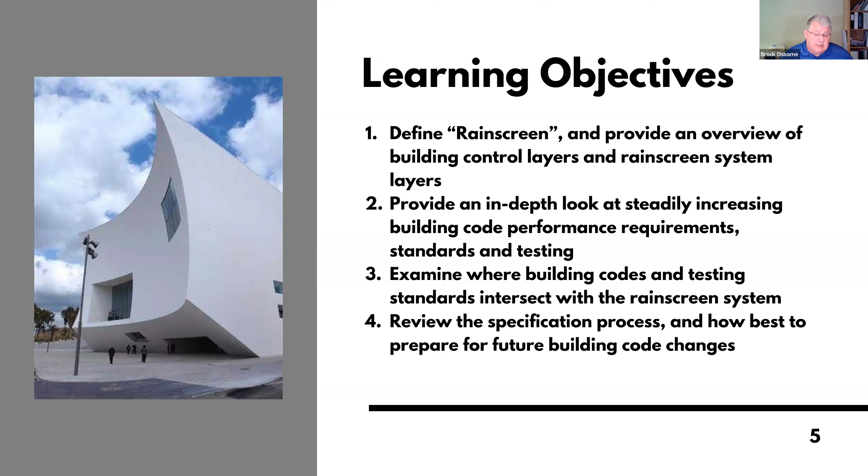In this first learning objective, we're going to provide a comprehensive overview of Rainscreen systems. This will include defining the term and functions of the system and reviewing the various control and system layers that make up a Rainscreen.

While Rainscreen systems are considered newer in the US, Rainscreen has a long-standing history in other markets. In Europe, for example, the concept of Rainscreen dates back to the early 1900s. As component manufacturers made their way into the North America market, there was some confusion around what a Rainscreen was. In early 2020, an organization was formed in an effort to provide clarity and become the authority on Rainscreens. This organization is called RAINA, the Rainscreen Association in North America.

RAINA has defined rain screens as a double layer construction that utilizes a surface to help keep the rain out and an inner layer to offer thermal insulation, prevent excessive air leakage, and carry wind loading, with a cavity between the two that provides drainage and drying.

The term rain screen has been defined previously in a few ways: first, as a single building skin material, which is really just a cladding; second, as a collection of individual components aimed at functioning as a system, which we refer to as a Frankenstein system, and we'll discuss the ramifications of these later on in the presentation; and finally, as a building science principle, which is really truly what a rain screen is.

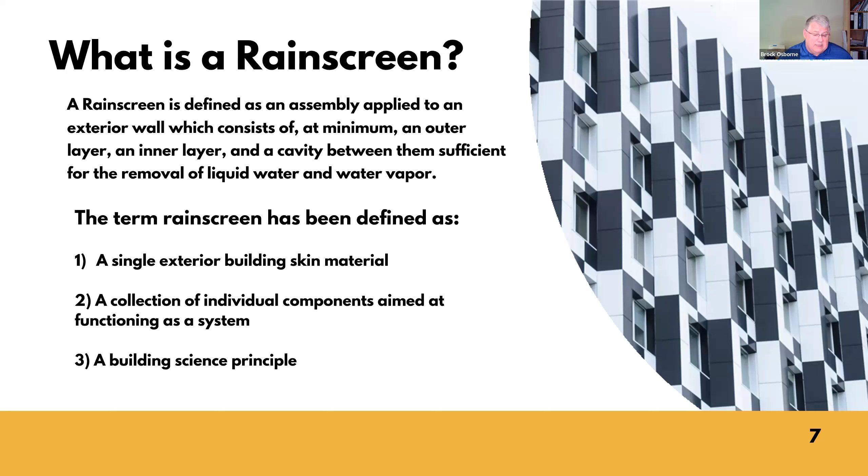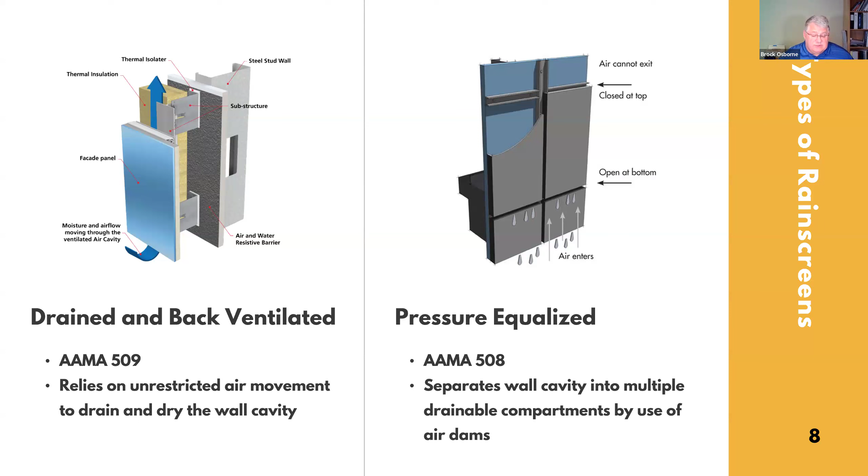In addition to the term and definition of a rain screen, there are a few different types. First, you have drained and back ventilated rain screens. These systems rely on unrestricted air movement to drain and dry the wall cavity. Second, there are pressure equalized rain screens, which use multiple drainage compartments and air dams to achieve their functionality. These are more common on tall buildings, which are subjected to higher wind loading.

As rain screens become more popular in today's buildings, we as designers, specifiers, contractors, and installers should become more familiar with their functionalities. The function of a rain screen follows a 3D approach to rainwater management: one, deflect; two, drain; and three, dry.

There are also other important building science requirements which extend this functionality: water management, which is a function of our ventilation cavity—without the cavity, we no longer have a rain screen system; and two, structural integrity, which is determined by the cladding durability and impact resistance, as well as the subconstruction pattern and fastening schedule.

Three, energy conservation, which is achievable with continuous outboard insulation and a thermally broken, thermally efficient subconstruction system. And finally, fire mitigation, which is reliant on full assembly flame spread tests and appropriate fire break details. We'll get into greater detail on these a little bit later in the presentation.

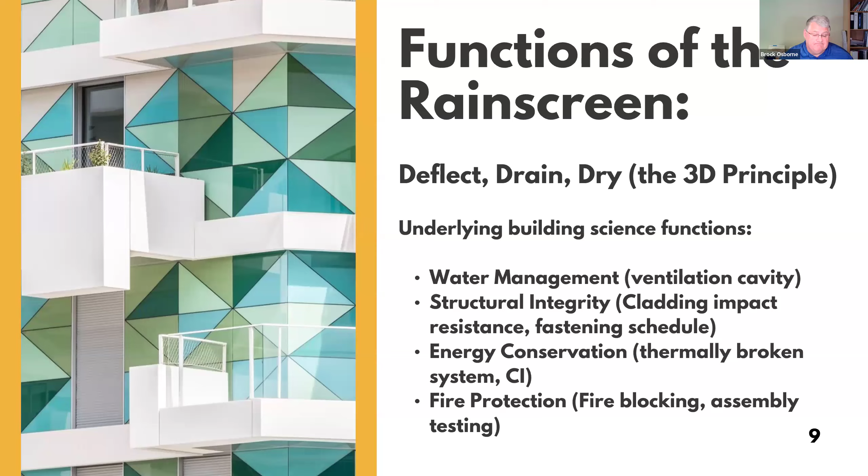So why specify a rain screen? Well, today rain screens are becoming an industry standard with incredible visual impact. Beyond that, let me give you some other reasons why you should consider a rain screen.

On top of the practical benefits it brings, rain screen claddings and facades are also huge for aesthetic purposes. There are nearly infinite cladding and subconstruction options that can allow even more creativity with the profile of the building. Because of the constant ventilation, they help greatly with harmful condensation and humidity, which can impact indoor air quality and compromise the wall over time.

If you include high-performance insulation, they can provide improved energy and thermal efficiency to the building. Depending on the air gap in the rain screen, they can provide continuous air circulation and drying. And they can even extend the life of the facade and reduce maintenance costs over time, by protecting the control layers from UV.

Finally, some rain screen panels come in really large formats, which can be panelized. Prefabrication and panelization means we can improve on constructability and the timeline on our job site.

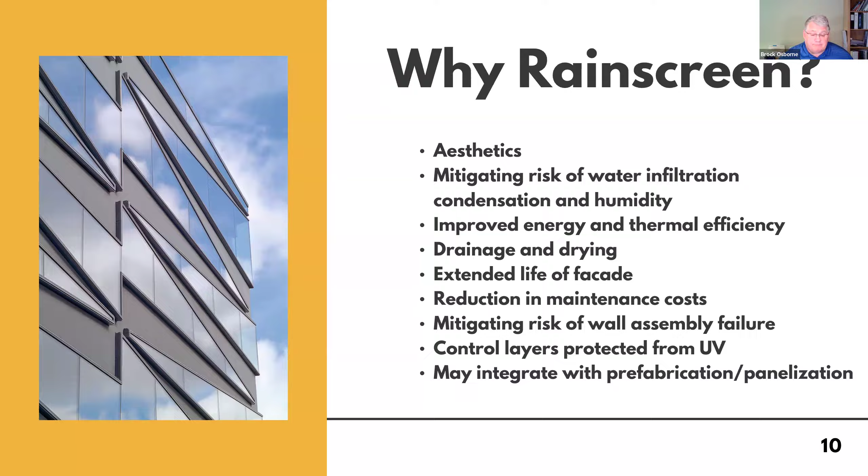Now that we have a better understanding of the rain screen concept, let's move on to control and system layers. This is where materiality meets the environment head on. The 5 control layers of the building envelope are vapor retarder, air barrier, water penetration barrier, thermal barrier, and durability and water shedding layer.

With a Rainscreen, these control layers are interspersed with the system layers that are unique to this type of assembly. We'll start at the face of our substrate and work our way back step by step to the finish.

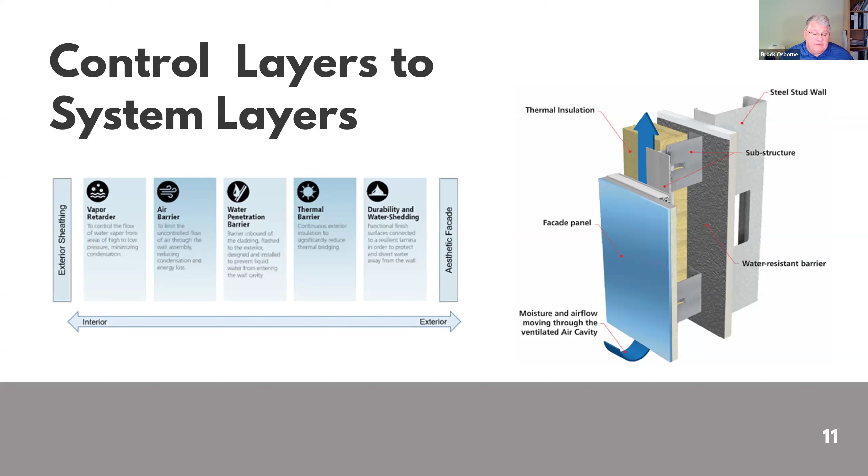Let's break down the first control layer a bit. They consist of air, vapor, and water layers. They're most often installed directly on the substrate and inbound of the thermal barrier. They are often not three separate materials, rather one product that performs multiple functions. Here, for example, we see a fluid-applied air and water resistive barrier applied directly to the face of the sheathing. This one material provides air, vapor, and water control.

In a Rainscreen assembly, our dew point is in our cavity, which is in the outer third of the insulation and behind the cladding. Because of this, we want to allow interior vapor to naturally permeate through to that cavity rather than trapping it somewhere within the wall. This is the value of the Rainscreen, allowing for constant drying and preventing water from getting into our buildings or settling somewhere within the wall assembly. Just note, some northern climate zones do advocate the use of vapor impermeable air barriers for their climate zones.

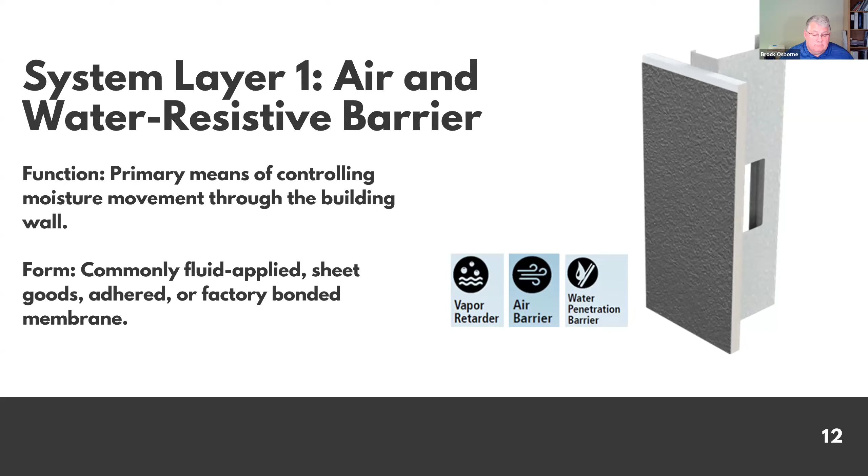System 2 of the exterior wall is the substructure, sometimes referred to as furring, subconstruction, or cladding support. It goes by many names. The function of these components is to literally secure the facade to the exterior building wall, as well as to create additional space between the substrate and the cladding to house our continuous outboard insulation and the ventilation cavity.

Substructure can take the form of brackets, rails, hangers, clips, etc. They're typically made of aluminum, stainless steel, coated steel, and fiberglass. Lately, we've seen a new higher performance material enter the space called ZAM, which is a zinc aluminum magnesium coated alloy steel. Something else to note is most, but not all, substructure systems offer adjustability for walls that are out of plumb. Certainly, this is very helpful when retrofitting an older building where wall plumbness can vary to a surprising degree. Finally, substructure can be a significant determining factor in cost.

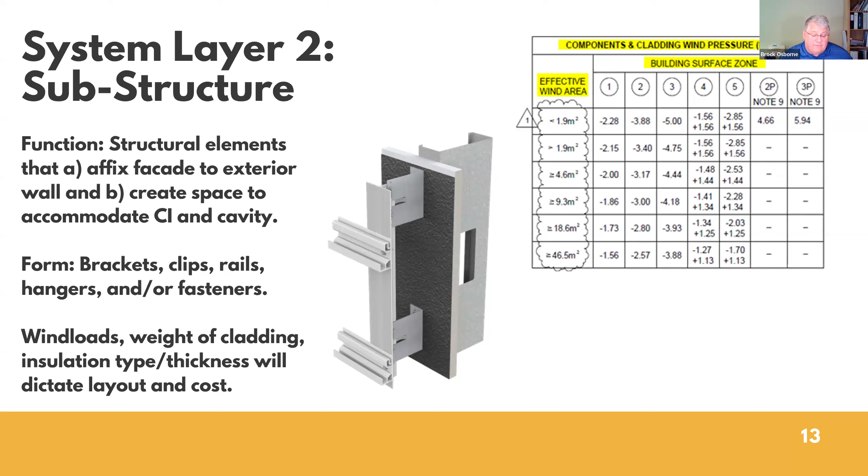For example, if you're hanging a very heavy cladding in a high wind load zone, you may need more hardware from one subconstruction manufacturer than you would from a different manufacturer. The amount and type of substructure pieces can also affect the thermal performance, just due to the number of pieces going through the wall.

Then in system layer 3 of the exterior cavity is the insulation, which provides us our thermal control. This outbound insulation acts like a jacket for the building. This means we don't expend as much energy maintaining thermal comfort inside when it's particularly hot or cold outside. It's worth noting that insulation isn't always used in a Rainscreen system, though when it is, the most common and non-combustible would be to use mineral wool. Special attention should be paid to the type of outbound insulation used in a Rainscreen assembly because of the adjacent air gap.

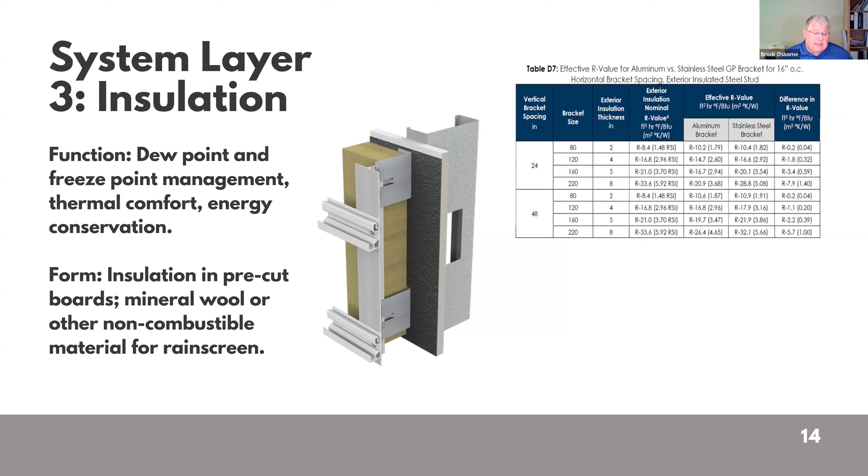On to the fourth layer. This is your air ventilation cavity, which also functions as your drainage plane. As we discussed before, the ventilation cavity, system layer 4, allows water to freely drain in an unobstructed path down and out of the cavity. Although no standard ventilation cavity thickness exists, a cavity of 20 to 50 millimeters is often recommended, which is about 7/8 of an inch to 2 inches.

However, some building science professionals do allow for smaller cavities. In fact, in Canada, they have a minimum of 10 millimeters, which is just 3/8 of an inch as their requirement. Because the ventilation cavity is so important with rain screens, I do want to emphasize its functionality, which is to promote drying of residual moisture, which is the key to the long-term performance of any exterior wall assembly. Without the ventilation cavity, the rain screen principle of enabling convective movement and exchange of air between the outer layer and the inner layer to dry the system would not be achieved.

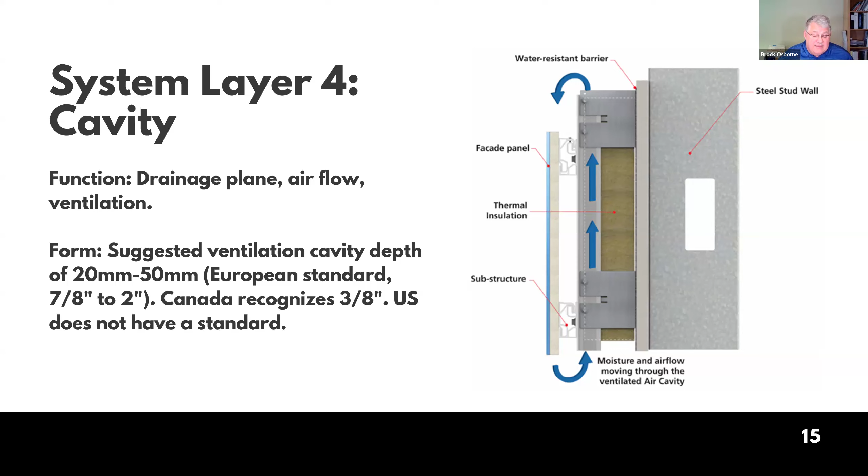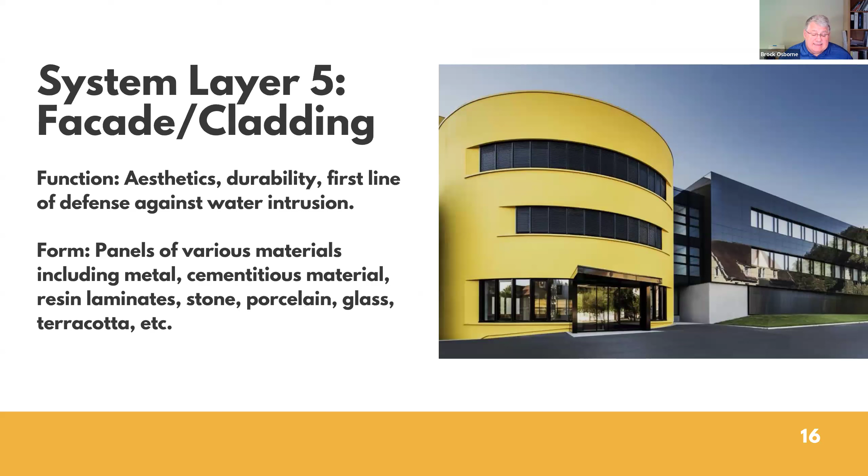Moving to system layer 5, the facade panel. When you look at a building, you see its skin or the facade. Yet the facade is much more than an aesthetic. It acts as the first barrier of bulk water intrusion for the rain screen, and then allows the air and water barrier to really finish the job. Not only is the facade or cladding an aesthetic, but it is the first line of defense in the overall building.

For our second learning objective, we'll be taking an in-depth look at the building code. We'll cover standards and testing that relate to those codes and how performance requirements are increasing for the building enclosure. Some key topics we'll be covering include the fire code, energy code, sustainability, impact resistance, wind load resistance, and overall structural stability.

The National Fire Protection Association, or NFPA, is the leading information and knowledge resource on fire, electrical, and related hazards. The ULC, or UL Solutions of Canada, has a similar set of standards and testing for the Canadian market.

As you can imagine, from a health, safety, and welfare perspective, their multi-story fire tests are among the most life-saving critical tests for a building enclosure. It not only benefits building occupants, but also first responders to a building in time of a fire event.

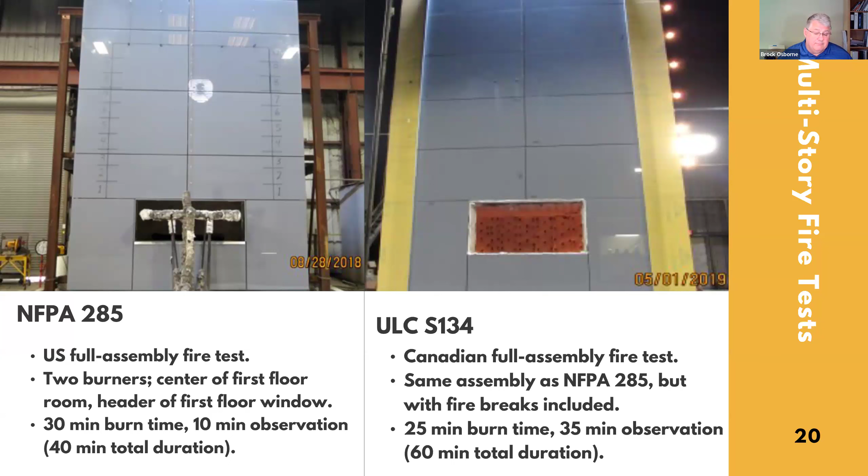For something as critical to health, safety, and welfare as the fire code, it's no surprise that local municipal codes continue to increase their requirements. New York City has a very high population density, as do other large cities in the US, with neighboring buildings that are very close to each other. As such, changes are being made to the New York City building code with regard to fire blocking.

As of late 2022, all buildings under construction that are taller than 70 feet will require fire blocking around all openings, horizontally at floor lines every 20 feet, and vertically between the occupancy units. These requirements continue to evolve, and acceptable fire blocking details are currently under development across the country.

In this wall section, you'll see one example of fire blocking in a rain screen assembly. This detail uses an intumescent strip applied to the face of the lamella block. For reference, lamella is a piece of particularly dense mineral wool. It's a type of mineral wool.

The intumescent strip is a special tape that, when exposed to extremely high temperatures, will expand and dam up the ventilation cavity, thus choking off any oxygen feeding the fire. It's a very important test.

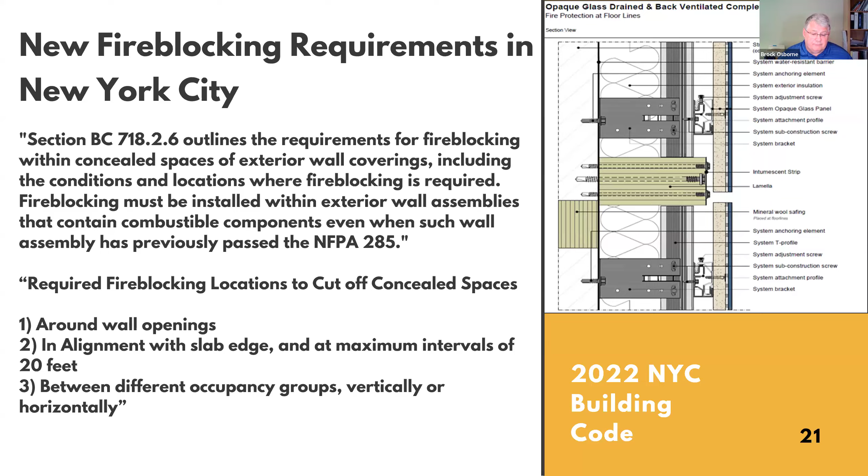Local energy codes are increasing regularly as we aim to significantly reduce the environmental impact in our cities. In New York, this is such a high priority that there are now policies that allow a building to come in contact with the neighboring lot line to allow for thicker, continuous outbound insulation.

Thickness of that insulation may also be determined by the type of insulation used, the R value per inch, the amount of insulation in the interior wall, and the type of framing used. The current energy code in New York also requires calculating all thermal bridging, a practice which is being adopted by many architects across the country. A thermal bridge is a place in the wall where thermal conductivity can take place from the exterior to the interior and vice versa.

Architects are also striving to exceed their local energy codes and achieve an even greater standard, like, say, net zero or passive house. A single source rainscreen manufacturer can partner with an architect to help reach these goals.

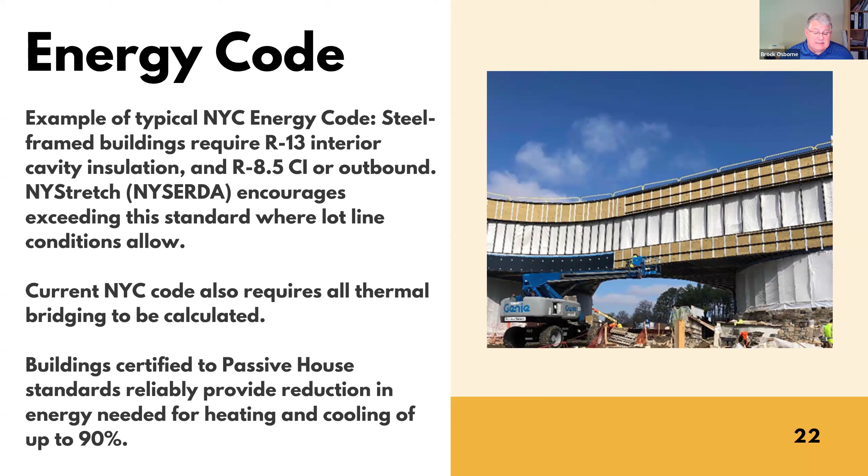In addition to energy efficiency, sustainability is top of mind as we work to lessen our impact on our environment. Here are a few examples of industry standards that represent sustainability goals. An environmental product declaration, or EPD, looks at an individual product from a company, from raw material procurement through to finishing and shipping. It then provides a transparent report on how that product could potentially impact the environment.

Now, B Corp takes the concept of EPD a step further. The certification process looks at the entire company, not just its individual products. This includes looking at ethical standards like hiring processes and pay scale, in addition to environmental impacts.

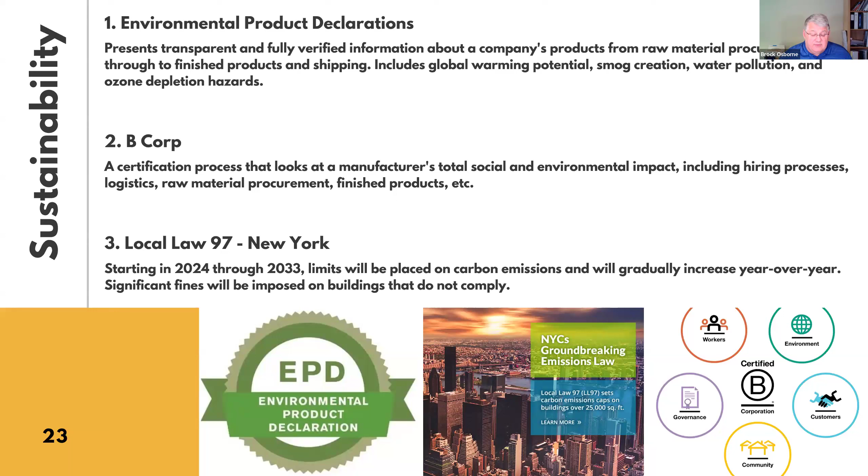Finally, local building codes are adopting policies that look at carbon emissions and their long-term impact. In New York, a policy called Local Law 97 is taking effect that will require the entire city to gradually retrofit. Increasing a building's performance also increases its lifespan, which reduces waste.

Now, impact resistance is another important factor to consider when looking at health, safety, and welfare.

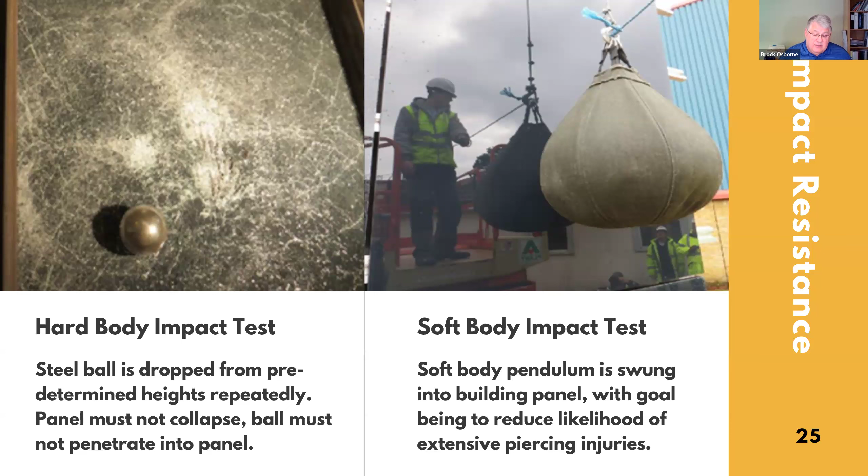Now, on the right, we see a soft body pendulum being prepared for the soft body impact test. So in this case, the test is called an EN 12600, which is another European standard for safety glazing testing. This test is intended to simulate the effects of human body contact or impact on a glass wall with the goal of reducing the likelihood of cutting or piercing injuries.

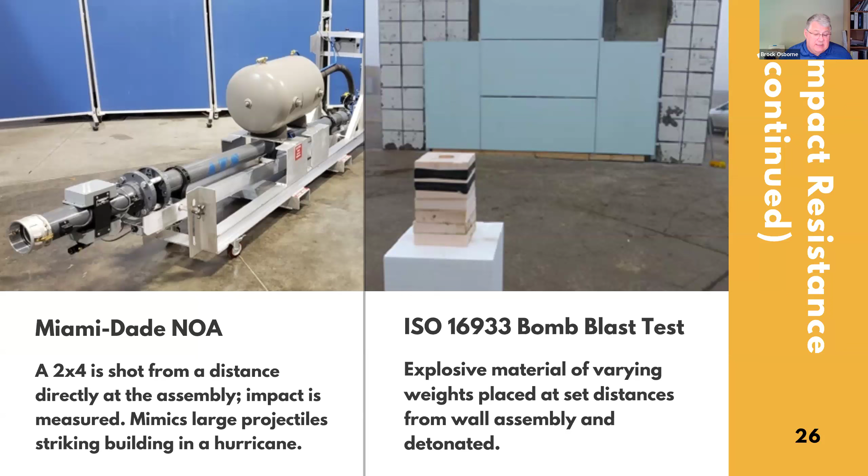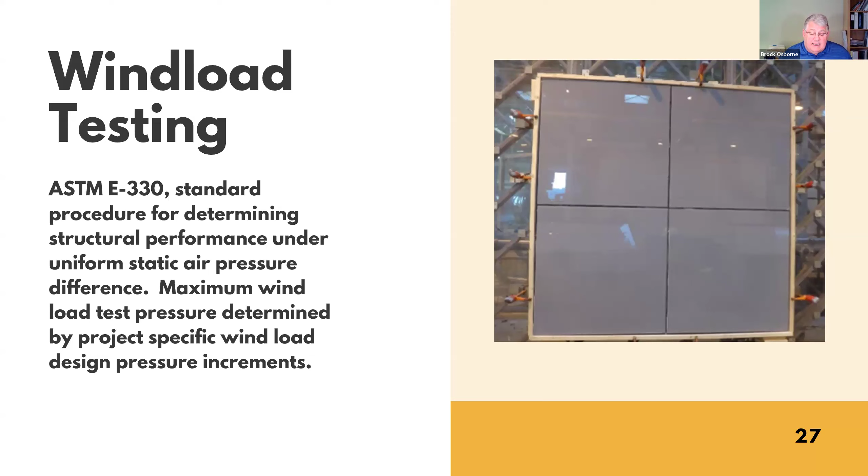The edges of the test specimen are sealed, and then wind loading is simulated in both directions to try to push the panels into the building as well as pry them off. Ideal failure point will be somewhere over 200 miles per hour. Now that we've gone over some general building enclosure testing and standards, we're going to get a bit more granular in this section. Let's take a look at the specific interactions between Rainscreen systems and the building code.

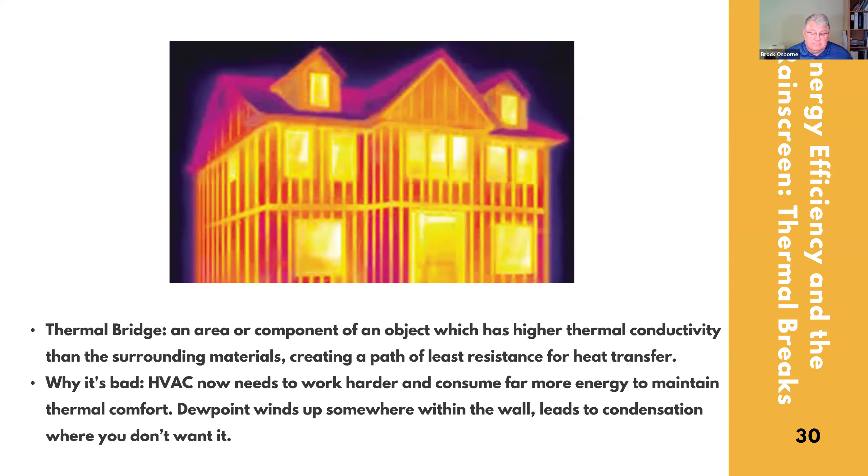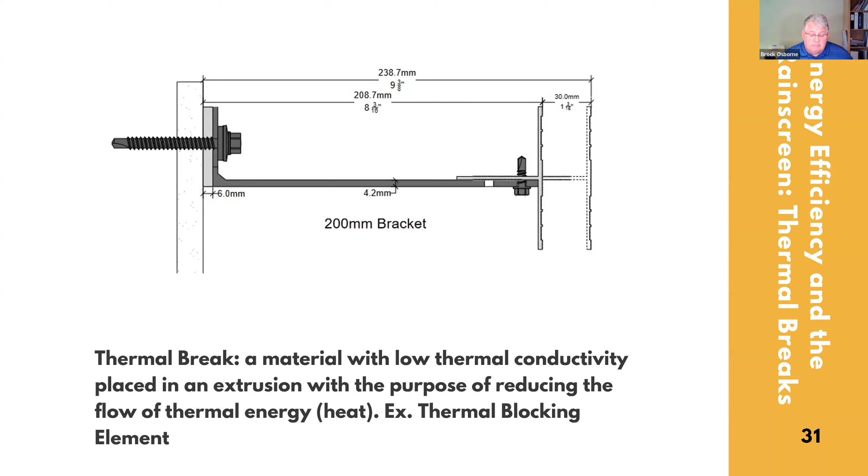Earlier, we mentioned ZAM, which is an acronym for zinc, aluminum, magnesium alloy coated steel. Aluminum brackets have a heat transfer rating of 201 watts per meter Kelvin, while ZAM coated steel brackets have a rating of only 45 to 50 watts per meter Kelvin, meaning there's significantly less thermal transfer. Watts per meter Kelvin is how we would measure conductivity for a given material.

ZAM galvanized steel has a corrosion rate 3 times lower versus standard zinc galvanized metal. And ZAM also offers better protection against scratching due to a self-healing effect of the chemistry. You're going to see more of that technology in the marketplace.

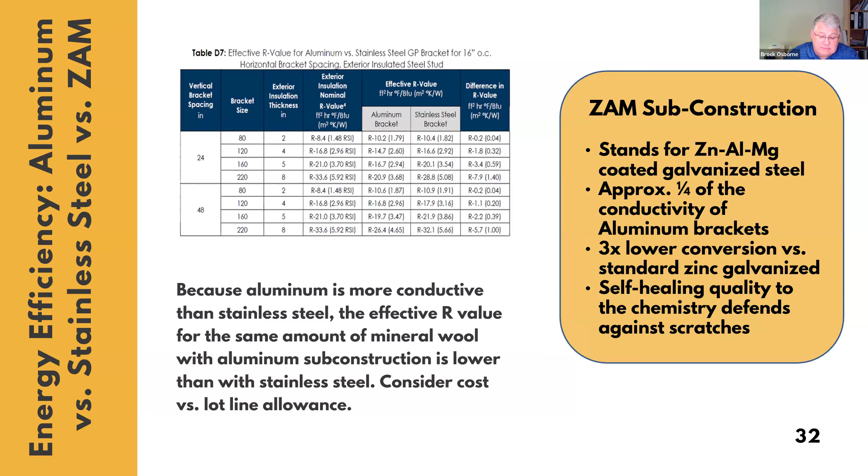Because of the air gap, a Rainscreen system should only use non-combustible insulation. This reduces the risk of rapid flame spread up the cavity in the event of a fire. Now, that said, the system should still have full assembly fire testing. We mentioned this when discussing the multi-story fire test. This is particularly risky when specifying multiple manufacturers together in the envelope.

This can lead to untested assemblies, and while the insulation may be non-combustible, like mineral wool, there could be another component that may be classified combustible. For example, a coating on a fastener or a type of cladding. If deviating from a full assembly fire-tested assembly, for example, you're substituting an air and water barrier that was originally tested, you need to have a qualified fire engineer make the determination and issue an engineering judgment to make sure you're covered. It's very important.

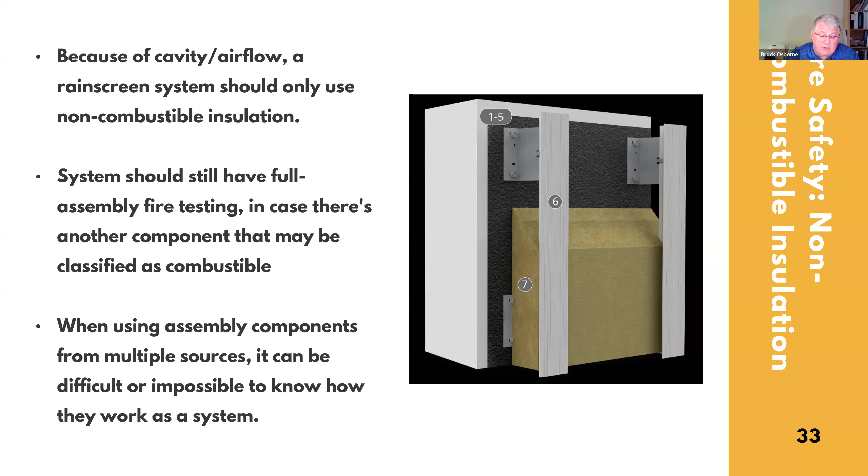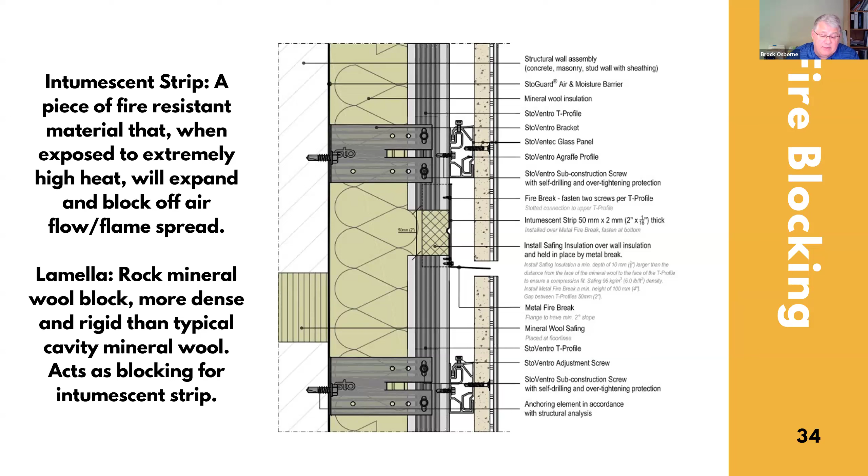There are so many different options for claddings. It's important to note that while there may be many materials that achieve a certain look, not all will perform the same way. Brick is an excellent example of this. There are brick look tiles, thin bricks, resin cast brick slips, and of course, real full brick. All may be able to achieve the same aesthetic. However, they're all installed in very different ways.

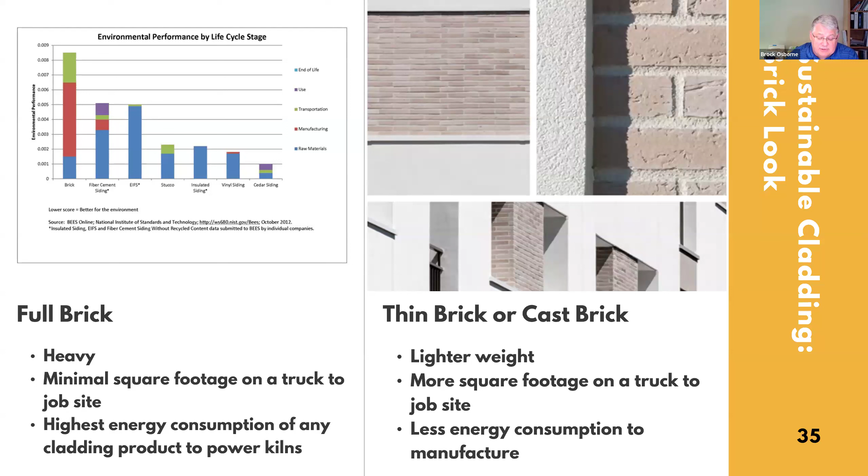Now on the right, we have a thin brick veneer over bonding and pointing mortar made to look like a full mortar joint. They're lighter, faster, easier to install, and consume less energy to produce per square foot than a full brick. The same look, same texture, but one option has a greater impact on our environment.

Now, opaque glass is a very eco-friendly option for cladding, especially when compared to the alternative window wall or curtain wall. Glass has a unique aesthetic, one that's become very popular on high-rise projects. It's also naturally a highly sustainable material. The main ingredient in producing the glass is, well, sand. You can also include recycled glass in the production process.

However, you can't conceal continuous insulation between two panes of windows, like in a window wall, and glazed surfaces are generally not very thermally efficient. There are different treatments that can be applied to glass curtain wall to increase energy efficiency, but it will still have a lower R value relative to other wall assembly types.

Now, opaque glass means that we can retain all of the positive green-friendly qualities of glass as a cladding and apply them in a way that allows us to build a more energy-efficient wall. We can also get even more creative with back painting, back printing, specialty finishes and other aesthetic options unavailable to us with vision glass.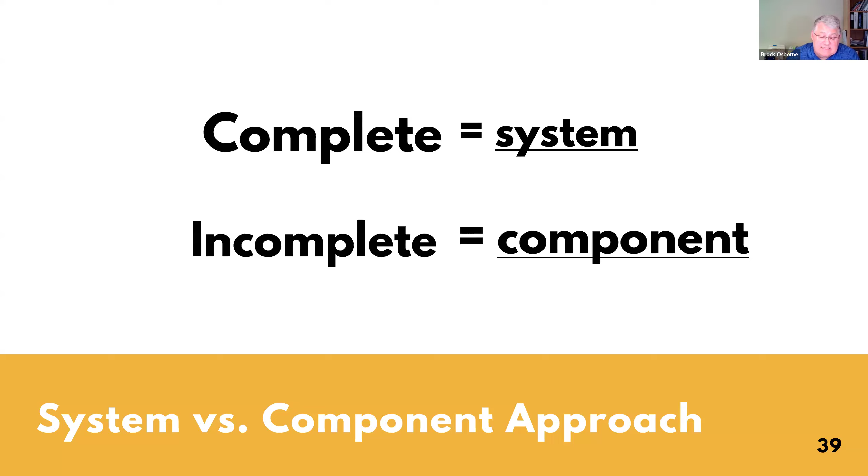So let's start with the component approach. In something as life-critical as a building, we should all be cautious of the by others mentality, which can lead to finger pointing and cause a lot of headaches.

So with so much information burdening our designers, contractors, and installers in the form of countless drawings, details, product data sheets, warranty information, shop drawings, coordination, submittal packages, the list goes on. Certainly there can be natural confusion on how separate components should work together. Let's look at a few by others examples of the component approach to illustrate this incompatibility.

So in this example, you have a detail from a substructure component manufacturer. They've called out a few components shown in green, which relate directly to the subconstruction and their product. Again, note here in red the number of per architect, per panel manufacturer, and per others callouts.

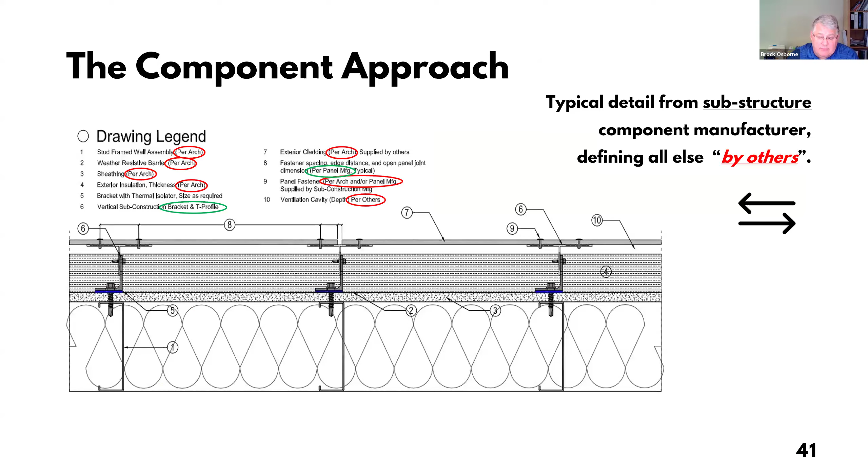In this example, it's a detail from another facade panel manufacturer, and we see, frankly, more of the same. The sheathing, air moisture barrier, and subconstruction are only generically defined or not even defined at all. Again, how you attach this product to the wall is up to you. If you look at this detail closer, shown is how you install the product horizontally.

But what happens if it's vertical? Does that change any of the answers? Do I need a different substructure? Are there any constraints with the insulation? There's really a lot more questions than answers provided in this detail.

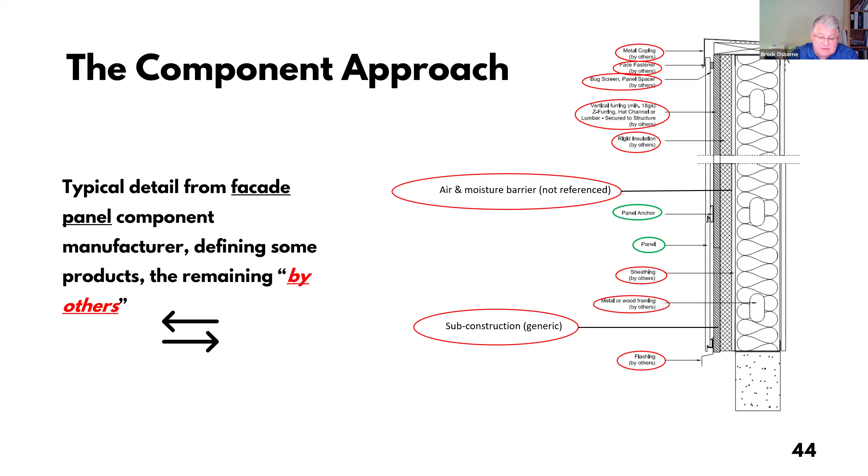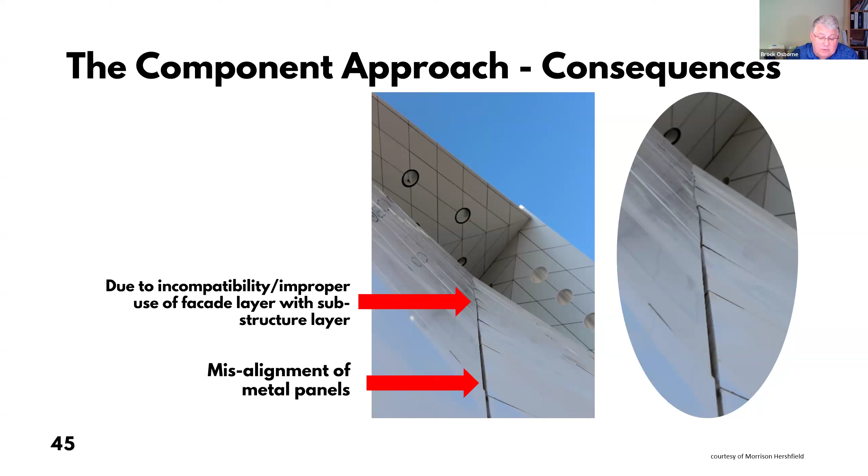Now let's shift from the by others details to a few real-world lessons learned about component incompatibility. Here's an image courtesy of Morrison Hershfield, where they identified an unsightly misalignment of metal panels, as shown by the red arrows. They identified the root cause was due to incompatibility and improper use of the substructure or furring, leading to this eyesore in the facade. This is where the finger pointing begins, with someone stating, "This is not a problem with our product. Check with the other guy."

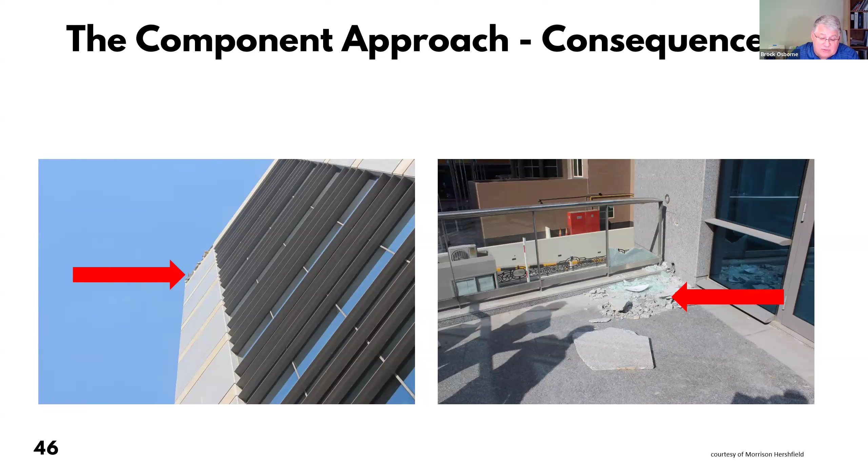In these photos, Morrison Hershfield was contacted to investigate a stone facade which had fallen from the parapet. You'll see on the left where the facade had fallen from, and then on the right where it landed. Thank goodness nobody was hurt. This time, they identified the root cause was due to the incompatibility and the improper transition and detailing between the facade cladding and the substructure, therefore causing stress on the facade and the cladding. Again, the finger pointing begins with the various parties stating, "My detail's clear. It really must be the other guy."

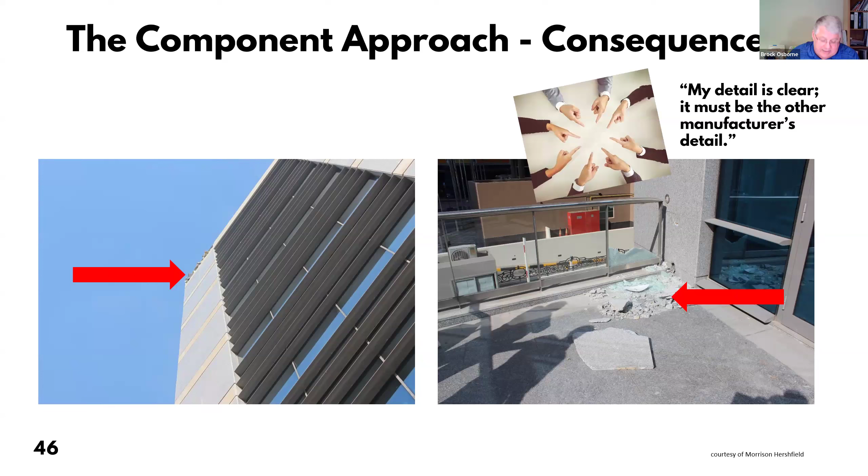So let's shift gears away from the component approach to a complete systems approach to Rainscreen design. In this example, we see a holistic and systems approach to Rainscreen design, where all the components of this glass panel assembly Rainscreen system function together. All the components, meaning the air and water resistive barrier, the supporting substructure, the insulation, the facade, are all from a single supplier, all of which are complete, tested, and warranted. Even the fasteners have been called out, which can often be overlooked, as we saw before.

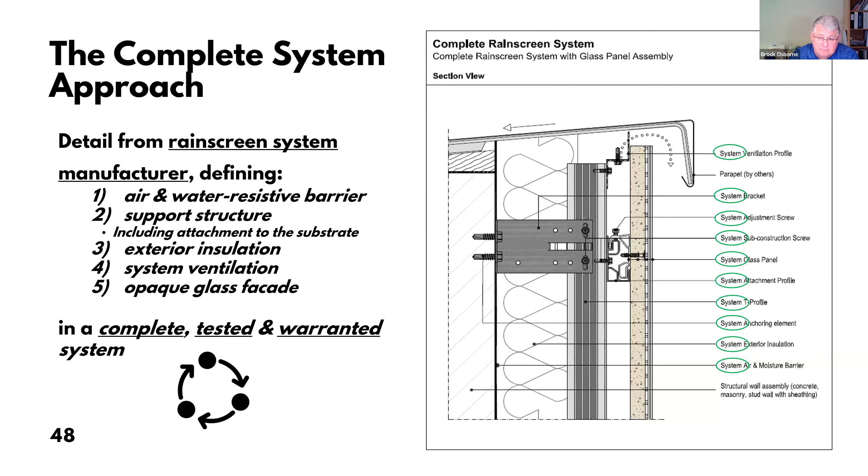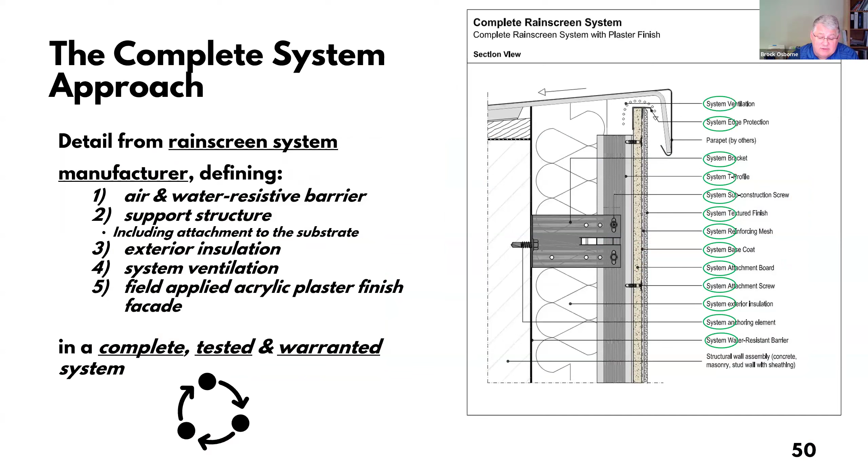Again, in this example, we see all the components called out in the exterior cavity, including the attachment of the textured finish. While the details might look the same, manufacturers that offer multiple looks or products might have different requirements for attachment, which I mentioned previously. So it's always good to reference their details for the specific systems that you're looking for.

Again, back to some project-specific examples. On the photo on the left, you can see that the subs can install the various layers of the exterior cavity all at once. Since the details are more clear, the sub can understand where the studs are located, where the transitions should occur, and most importantly, what's behind the previous layer, well, since they installed it.

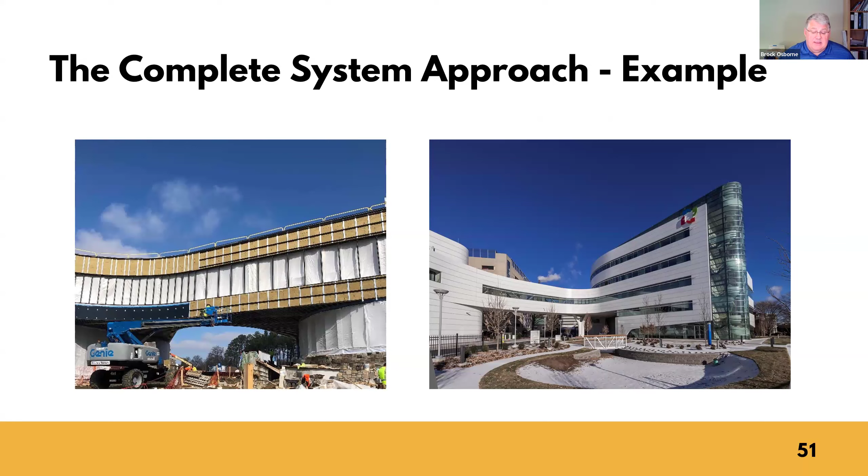As we've discussed today, we're challenged by many factors in the construction process: components not working together, creating collisions, the by others game, and the amount of effort it can take to create a code compliant system.

So how do we get to a complete Rainscreen? Let's start with why we need to get to a complete Rainscreen.

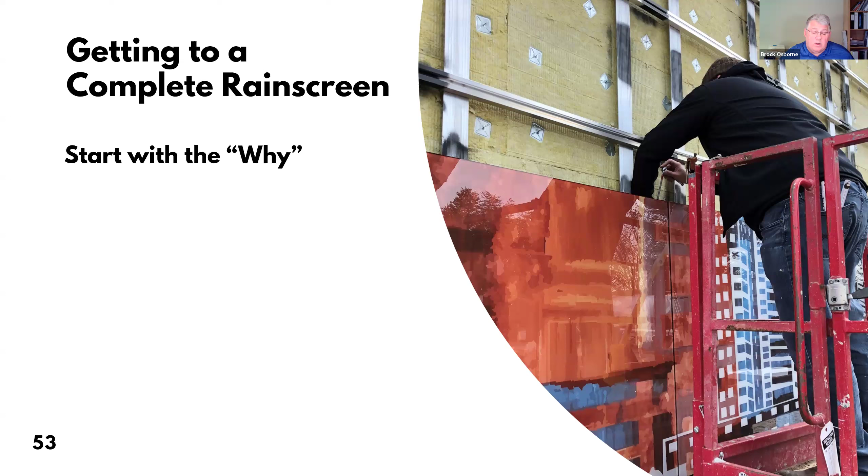Too often in today's construction, there's considerable value engineering and cost control, leading to piecing together of components. While this works and can lead to code compliant assemblies, we need to think about our exterior cavity as one whole assembly. By connecting design to construction, we know that design collisions will be reduced. We also know that by making things less complicated, in the form of reducing the number of components to buy and the number of people involved on the job site, aka subs, the project will benefit.

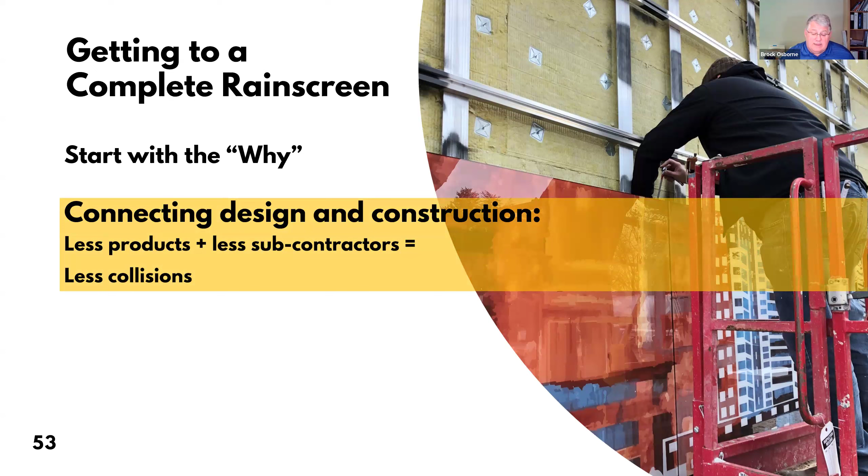So in short, less product plus less subcontractors equals less collision. And all of this will lead to improved constructability and better project delivery.

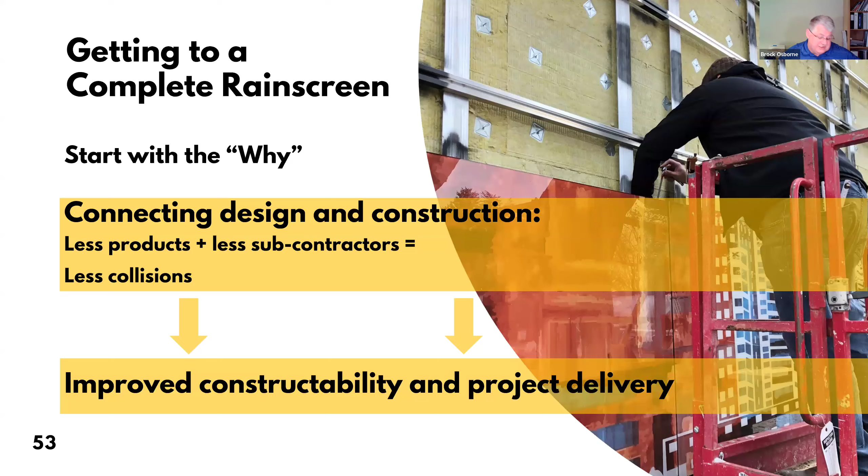So why is this important? Think about a project you're on now or have worked on in the past. How many components or component layers were in the exterior assembly? How many manufacturers were involved? How many documents did you have to search for?

Let's look at this from a simple math equation. If we take all the information we need for a project and sum it together, we get our Rainscreen assembly. In this Rainscreen assembly, we have all the control layers, the component layers, and the ventilation cavity.

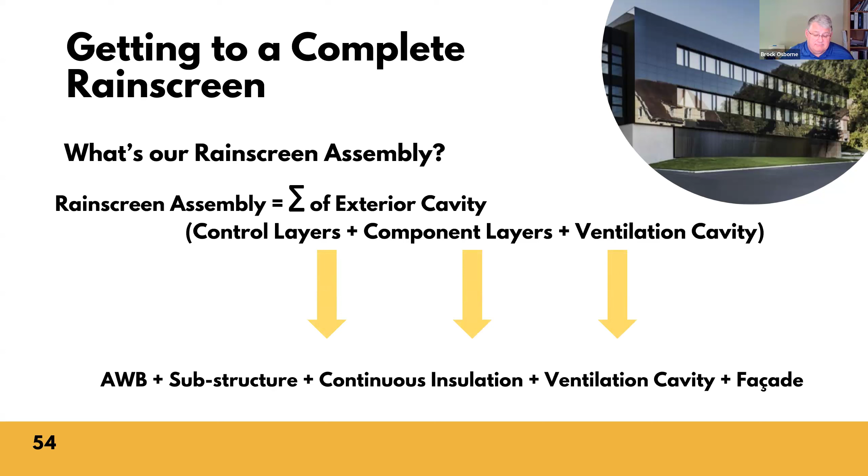Thinking back to what we talked about earlier, these control and component layers have various components, and each has supporting information. That supporting information can come in many forms, such as specs, product documentation, details, submittals, test reports, code approvals, and so on. As you start adding all of this together, you can see that it can become overwhelming, which I'm sure some of you already know.

So by combining the equation from the two previous slides, we find that a complete Rainscreen system would become the sum of: one, all the components or materials, and two, all of the supporting documentation and services required to understand, design, and install a Rainscreen.

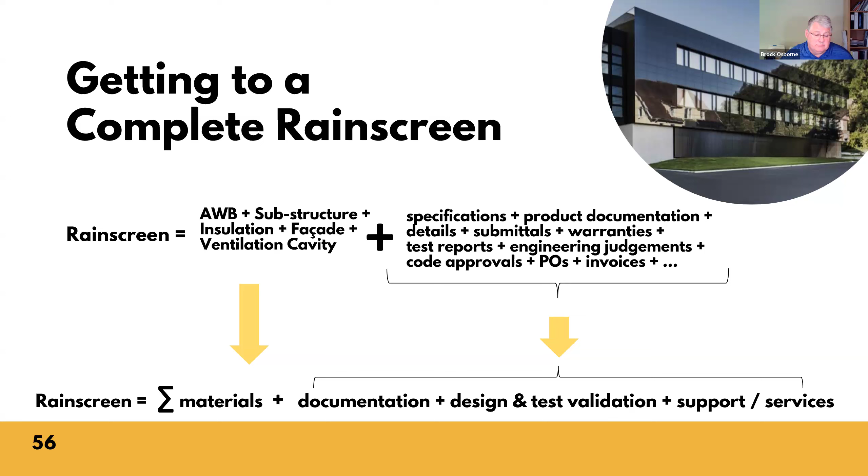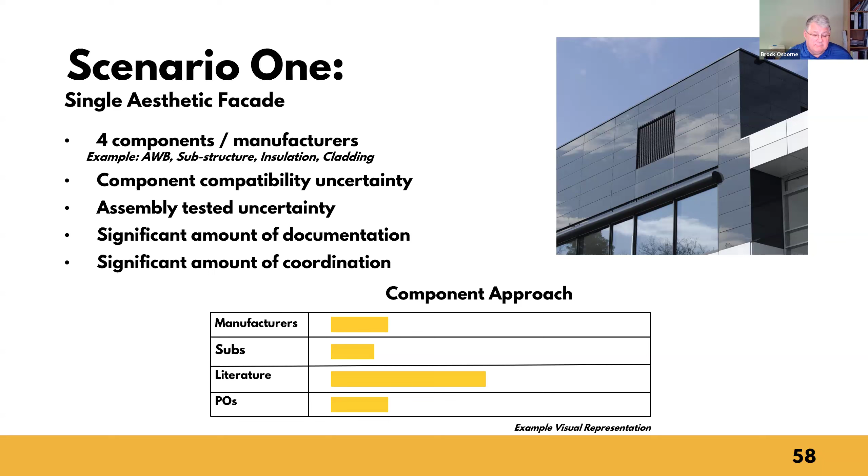Certainly, we could get a bit more uneasy related to the level of uncertainty about testing and compatibility. Also, we know that the level of documentation and coordination will increase again, perhaps twofold.

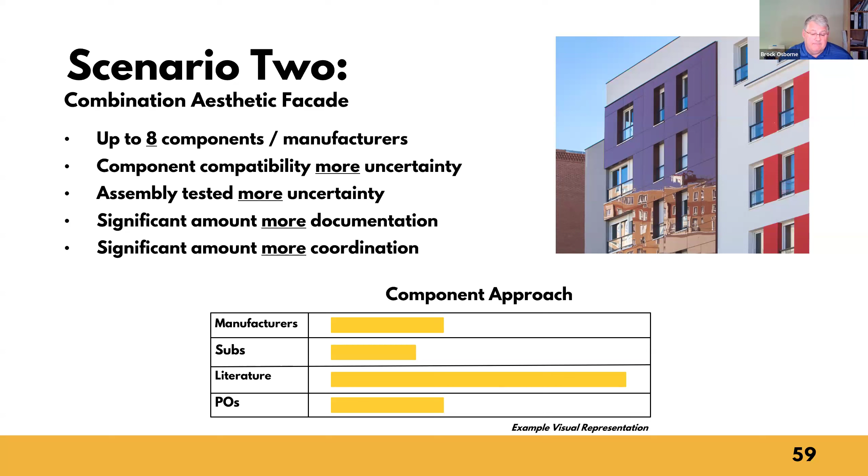Regardless of the scenario we look at, Rainscreen design is also about managing or mitigating risk. As designers, contractors, and installers, we need to mitigate risk in all of our Rainscreen designs. By doing so, the building owner will benefit, as will those who live and work in the building. With the component approach, due to its complexity, risk is much harder to manage.

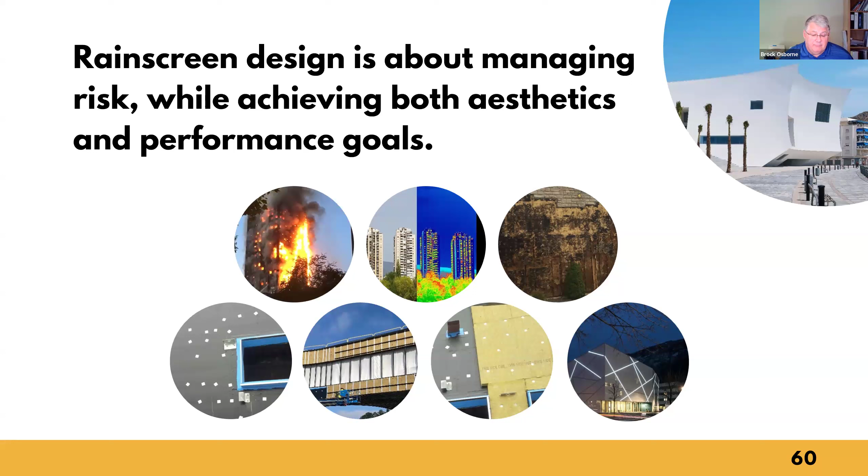What if there was a way, regardless of whether you had a single aesthetic, dual aesthetic, or more, to have a complete approach? Intuitively, the level of complication would be greatly reduced.

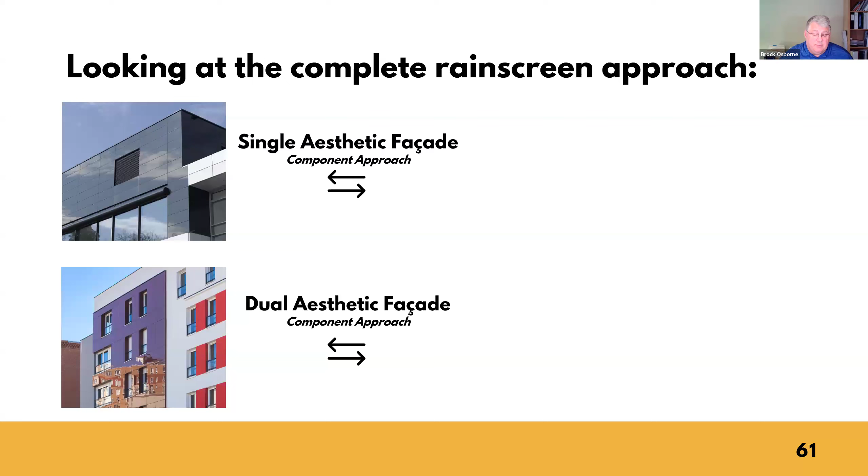But going beyond our intuition, we know that a complete approach will pay dividends: a designed, tested, and warranted system, a single manufacturer or at least reduced manufacturers, having certainty of component compatibility, having certainty of a tested assembly, requiring less documentation to research and collect, and requiring less coordination with only one supplier or reduced suppliers.

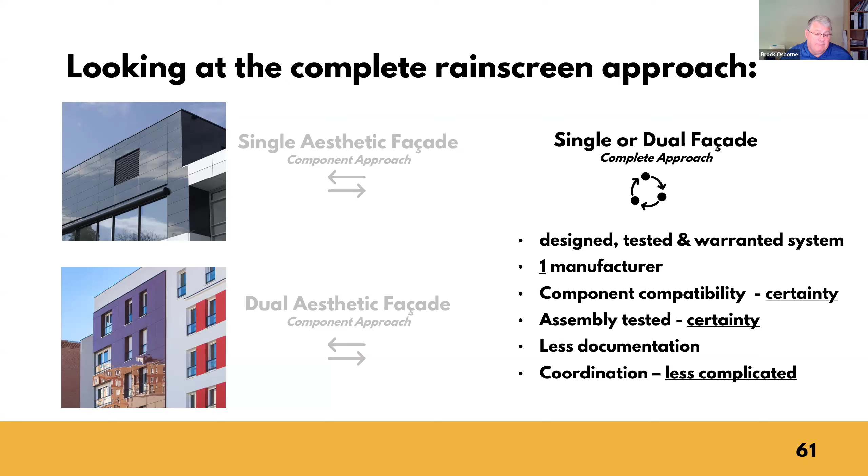And with a complete approach — having less components, less manufacturers, less documentation, less design collisions, and needing only a single system warranty from a single manufacturer — we will be able to reduce risk and give confidence to our clients.

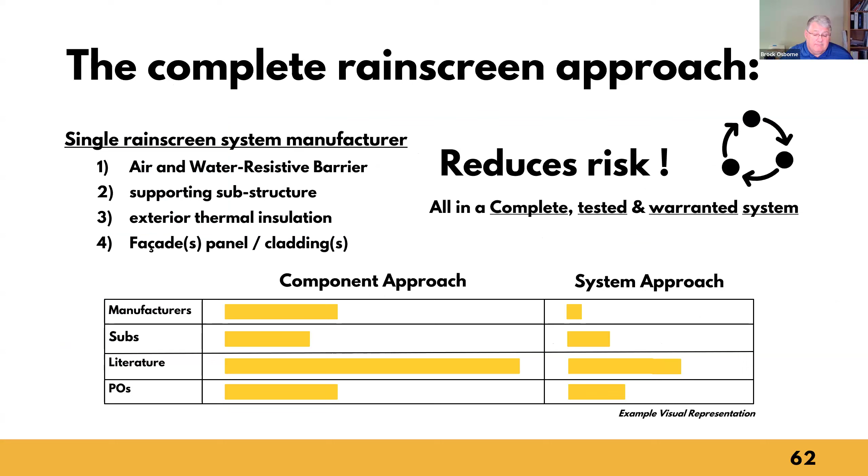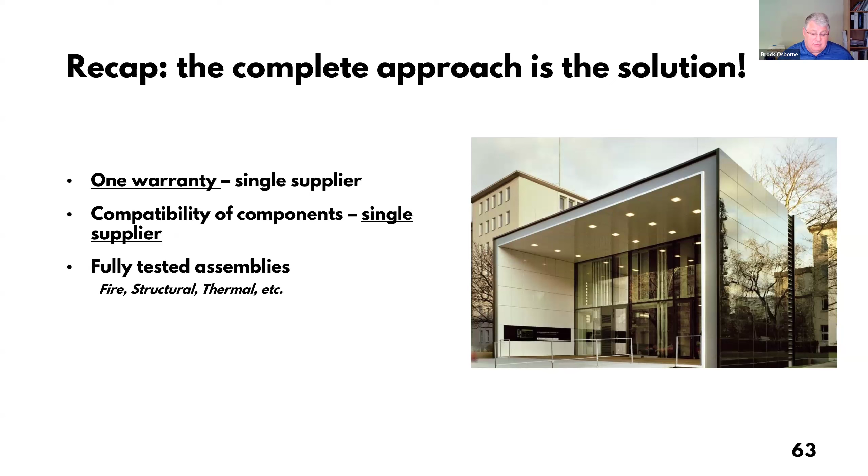Therefore, with a complete approach, we can deliver benefits and reduce complexity. By providing a full system warranty, compatibility of components, fully tested assemblies for fire, structural, and thermal to address health, safety, and welfare, weather-tight transitions, better design support to address design collisions, provide unlimited aesthetic options, and really just one phone call to make.

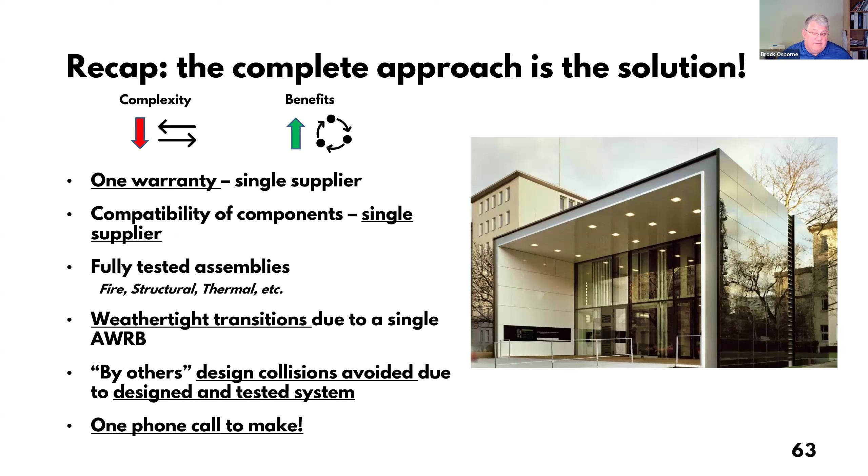Well, that was a lot. Thank you very much. Hopefully you have a better understanding of the various Rainscreen technologies, control layers, and component layers. By specifying a complete Rainscreen that's tested as such, you will increase the building performance and reduce the risk on your project team, the owner, and the occupants.